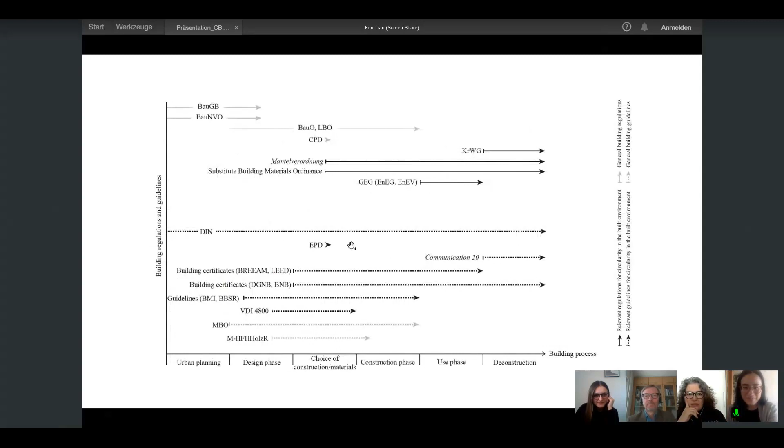Okay, let me try again. Shouldn't be that hard normally. I had some trouble when I tried to do this. Yeah, me too. So, is it still black? No, you can see it. Fine, it's fine. And you can also see the next page? Very small fonts. All right. Good, then let's see how I'm getting out of here again. All right.

Anybody else wants to try? Janika? I can try it. How do we pronounce your name? Janika? Janika, so it's fine. I don't know if it's shared now. But I think if you click on the arrow at the top of the screen, you can just remove the small slides and just have the big one. Oh, like this? It's the same. It's quite small, you know. Yeah.

I did it via the content library because they said you need to upload it there, but maybe that's... Yes, I did the same just in case, but it's really small to read. If you want to share your screen, you can actually do it by clicking the small screen with the arrow at your left-hand side in the black column. Okay, yeah, then I need to open it on my laptop first. Yeah. I can try now. We have tried before, but while Janika opens, I can try mine. Is that okay? Okay, go ahead.

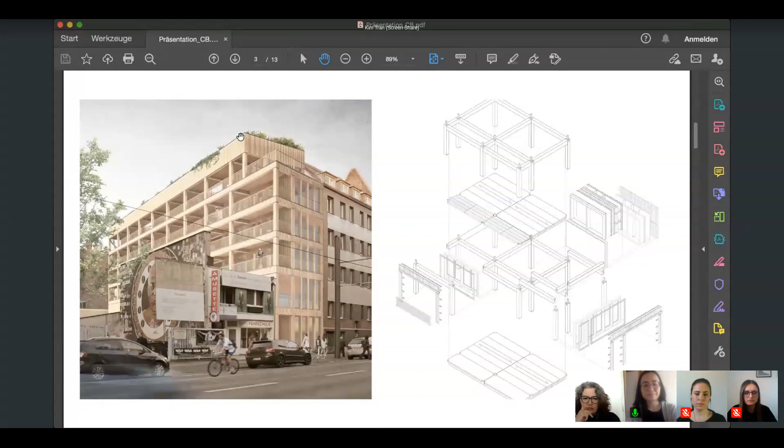And these are then based on the non-obligatory MBO. Apart from this, we have further guidelines and certification systems for sustainable building, which most of all are not legally binding though. So based on this MBO and therefore also the building code of the federal states, the planned buildings are divided into 5 building classes, which are specified by the height and the area of the building. And according to each class, there's a set of requirements for stability and also for fire protection. It's quite easy to remember: the higher the building class, the higher are the requirements as well.

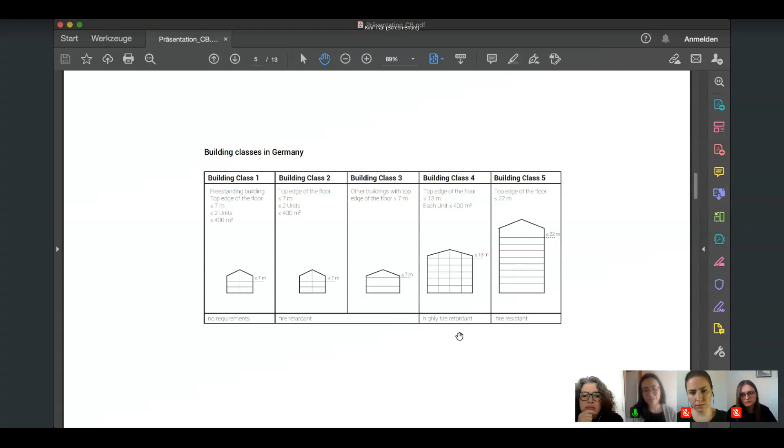So if you look back to our case study, the following occurs. We have a height of 17 meters, so that the building falls into the highest building class, which is building class 5. The requirements for fire protection from class 5 on prescribe non-combustible insulating materials with a melting point of more than 1,000 degrees. So in this case, if we would like to consider cellulose fiber as an insulation material, it will fall out of this range, even though it could meet fire protections even better in some cases. And also mineral insulating materials have a much lower potential in circular economy.

And according to these guidelines, it is also not permitted to have visible timber components, and load-bearing components must also be cladded with a fire-resistant material. The cladding of timber is called encapsulation, and it is supposed to ensure a higher fire resistance which is comparable to mineral materials.

And as you can see in these pictures here, the design proposal that we made does not really fit into these requirements. However, in these cases in Germany, it is possible to hand in special permissions also based on discussions with the firefighters, because after all, in general, you have to consider, even if wood is a combustible material itself, it always needs to be considered within the whole building component and the structure in order to draw conclusions on the fire resistance. And also using sprinklers would help, but actually they're not very well used in Germany.

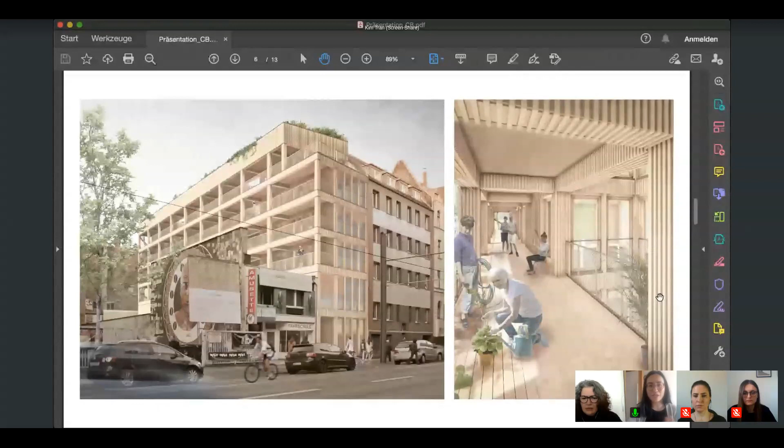So far, multi-story timber buildings up to building class 4, so with a height of no more than 13 meters, are possible in Germany. In building class 5, however, it has been difficult to carry them out without any special permission. So yeah, that's a bit sad because there are already proven international examples that prove that it's feasible.

If we go over to the topic of building with recycled materials, we must consider the German waste and construction law. Here we have the Waste Management Act, which is based on the EU waste framework as a binding federal law. However, it does not set any requirements for the quality or quantity of waste, nor does it set any specifications for the manufacturing of new constructions regarding their recyclability.

Further regulations in Germany, just like with timber construction, lie in the responsibility of the federal states. Here we have other laws that, for example, require waste to be kept separately, but here we also have exceptions which are possible when things are just not economically feasible or technically possible.

Since 2006, the federal government has been trying to implement the Mantelverordnung, a national framework for groundwater, for building material substitution, for landfill and soil protection, in order to uniformly regulate and tighten the recycling of building materials as well as the use of mineral materials. But just like other attempts, such as Communication 20, these regulations and guidelines are orientated towards civil engineering and not specifically toward building construction.

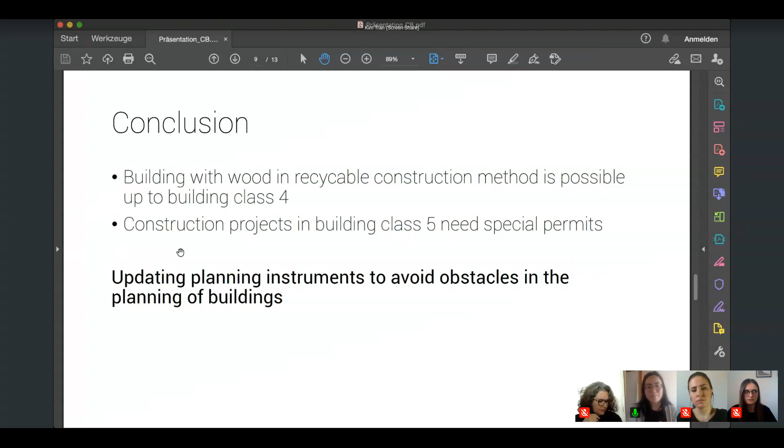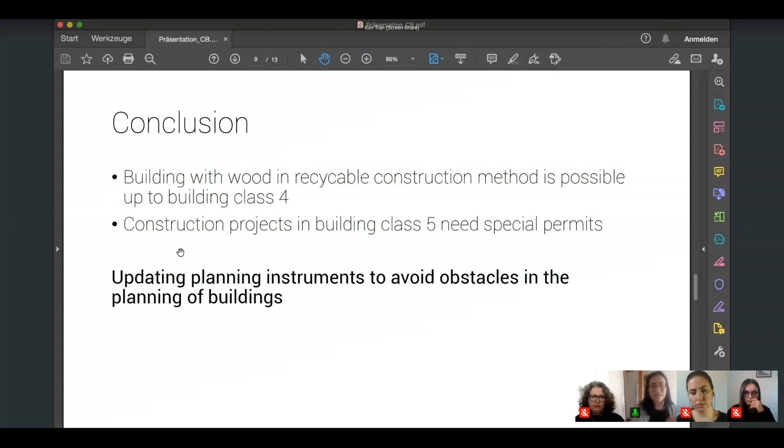So I would say, yes, we urgently need an update in the planning instruments so that ecological buildings do not require special permits anymore. We need an adjustment of the actual building codes, making it easier, for example, to build multi-story timber buildings in building class 5, in order to serve the demand for affordable housing in urban areas while meeting planetary boundaries.

Also, reusing materials so far has been difficult to carry out in Germany because you always need these individual case approvals. It is important to lower legislative and administrative obstacles. There should be a relaxation of standards, an acceleration and standardization in test procedures, as well as more information on used products and end-of-life scenarios. All in all, we need to somehow lower or make the guidelines more flexible in order to not cause too much planning effort. And that's it so far.

Thanks. Thank you very much, Kim. Right on time. Right on time.

I think if anyone in the audience has a burning question, we could take one or so. And it seems that Ronald is definitely having problems accessing the conference website and the room. So if there are questions from the audience, there's time to try to answer one of them.

Otherwise, in the meantime, I would say your presentation made me feel relieved, because if I think of the situation in Brazil, I always thought Germany would be a holy grail to pursue. So it's kind of relieving to hear that's not the way we imagine from far away. Oh really? I'd be interested to know why.

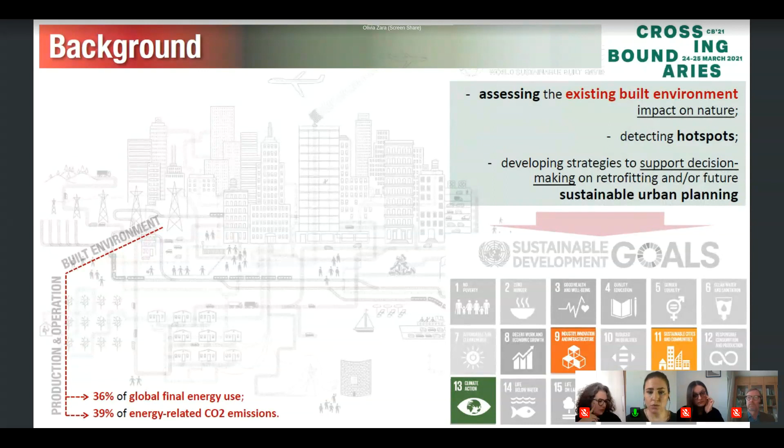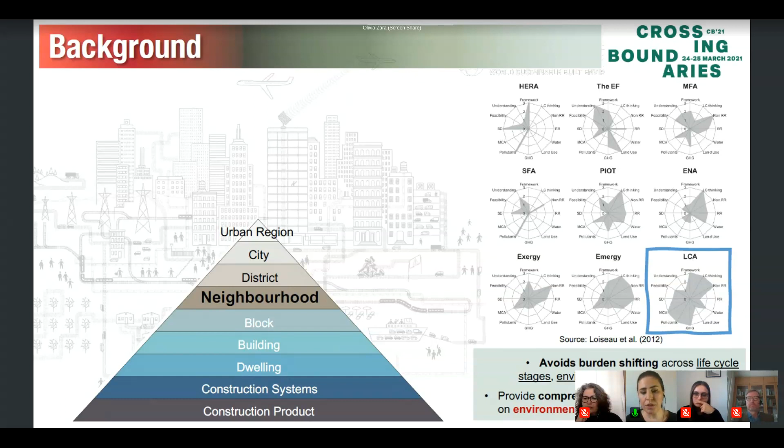However, cities are complex, long-lasting systems, and when attempting to handle urban intricacies, a complexity compromise is to subdivide the urban area into smaller cells, such as neighborhoods. From a variety of existing methods for environmental assessment of urban areas, life cycle assessment stands out due to its ability to avoid burden shifting across life cycle stages, environmental impacts, and territories, and its ability to provide urban decision makers with comprehensible information on environmental sustainability.

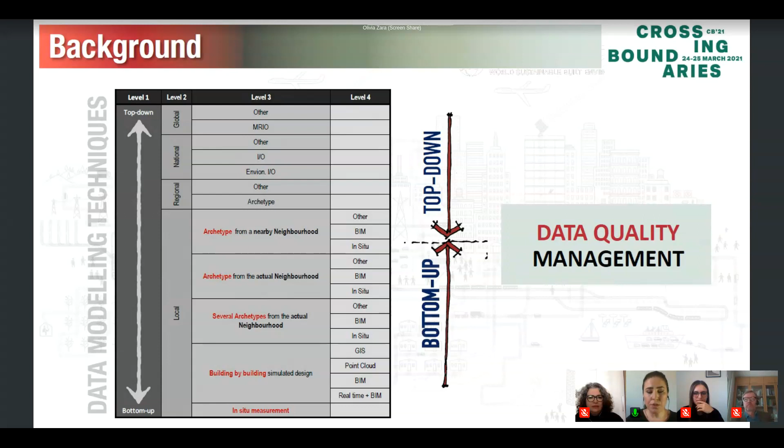Nevertheless, due to its comprehensiveness, detailed scope, and multi-criteria assessment potential, life cycle assessment is a data-intensive approach, and at the neighborhood scale, data challenges are even more intensified. Moreover, as the reliability of life cycle assessment outcomes depends on the quality of the original background data, data quality management should be an integrated part of the process. Thus, finding balance between required and feasible information collection, and determining the best way to handle data quality and uncertainty, should be a priority when pursuing reliable results.

Therefore, this study explored how data collection and modeling methods influence the data requirement modeling quality balance in neighborhood life cycle assessment. It explored top-down and bottom-up approaches to generate information input for life cycle assessment at the neighborhood scale, aiming to identify strategies to improve modeling while balancing data collection needs. This represents the first of a three-phase research project aimed at developing a methodological framework for life cycle assessment at the neighborhood scale. Two life cycle assessments were performed in a single urban block of the University of Campinas campus, containing 15 buildings and surrounding infrastructure, using top-down and bottom-up data aggregation approaches.

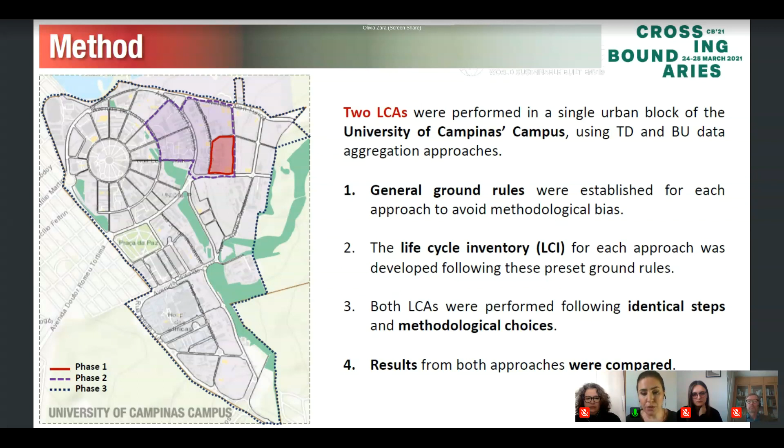The method followed four main steps. First, general ground rules were established for each approach to avoid methodological bias. Second, the life cycle inventory for each approach was developed following these preset ground rules. Third, both life cycle assessments were performed following identical steps and methodological choices. And finally, results from both approaches were compared.

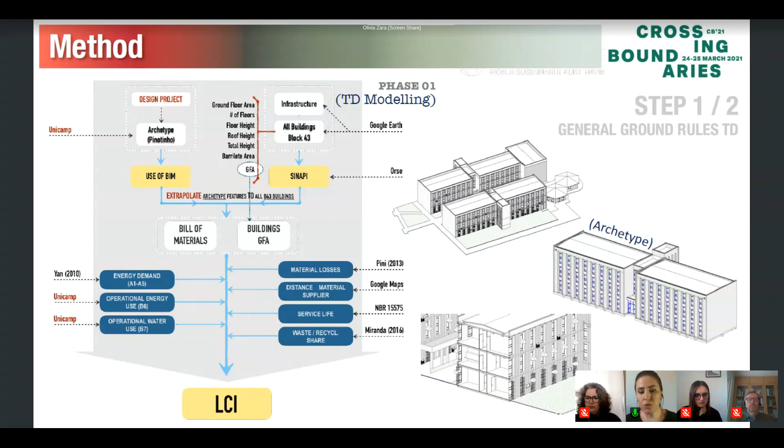As a general ground rule for the top-down approach, mainly national, regional, and local data based on one specific archetype that best represented all of the campus's buildings could be used. This archetype was modeled using a BIM tool, and its features were then extrapolated to all of the buildings in the studied urban block.

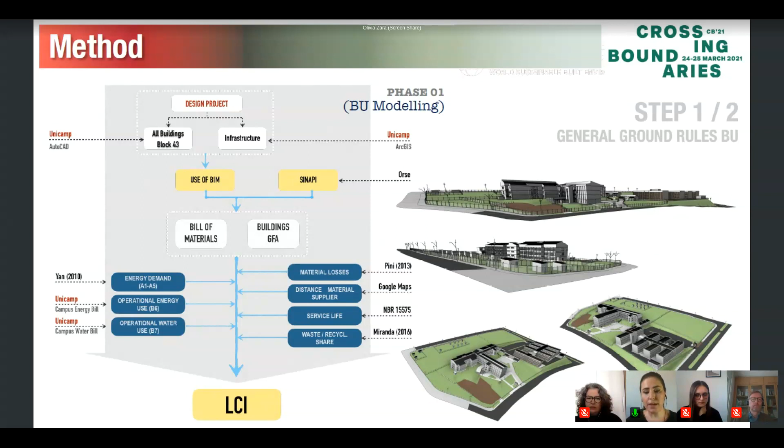For the bottom-up approach, on the other hand, we got the design documentation of each of the 15 buildings and surrounding environment and modeled it using a BIM tool. Then we were able to automatically extract a more detailed bill of materials and gross floor area, enabling a more refined and realistic life cycle inventory analysis.

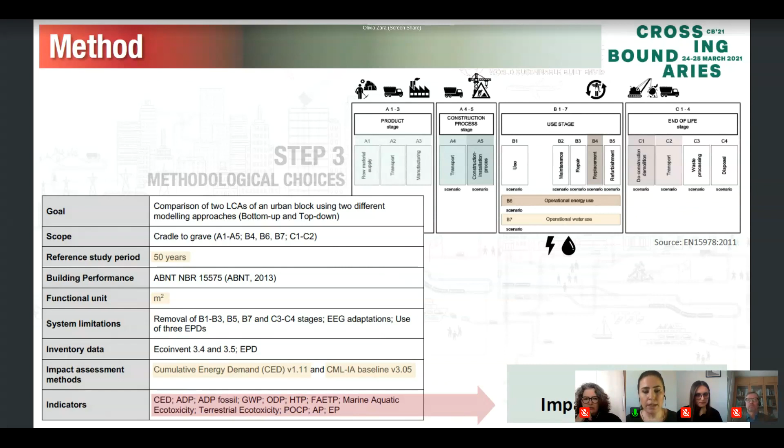Both life cycle assessments were performed following identical steps in terms of system boundary and methodological choices. A 50-year reference study period was used. The functional unit considered was square meter. The impact assessment methods were cumulative energy demand and CML baseline, and 13 impact categories were considered.

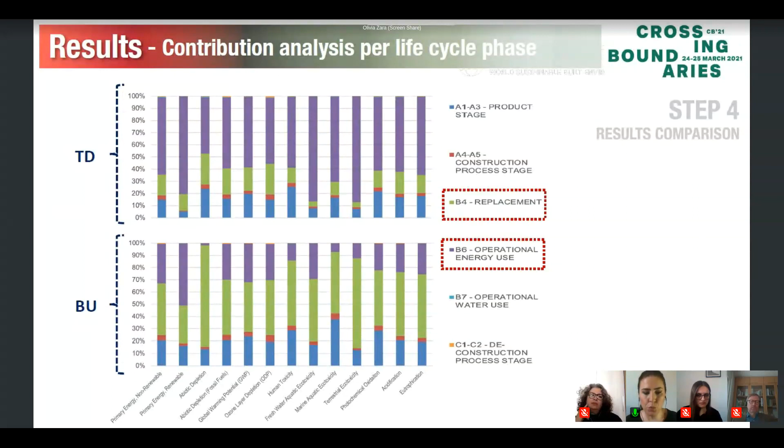In terms of results, we were able to identify significant contribution discrepancies between both approaches. For example, when comparing the contribution per life cycle phase, we can see that the replacement stage is considerably underestimated in the top-down approach, which is dominated by the operational energy contribution. This can also be seen when comparing results of the contribution analysis at building elements level. The top-down approach is still dominated by energy use contribution, while the bottom-up approach highlights the impact of interior partitions and finishing, which should not be neglected, as the impacts are substantial.

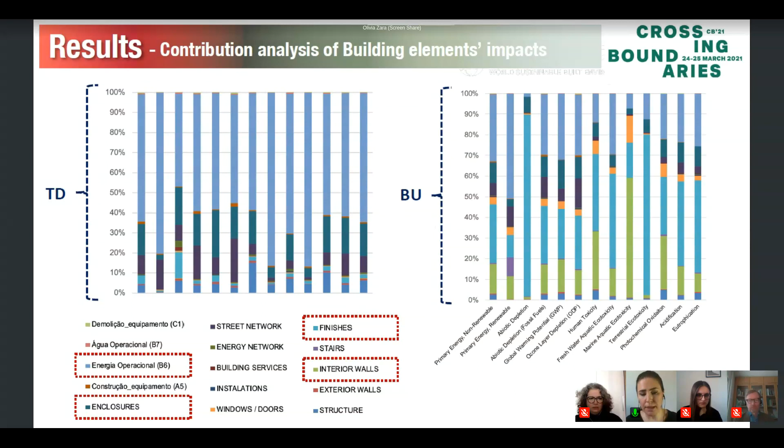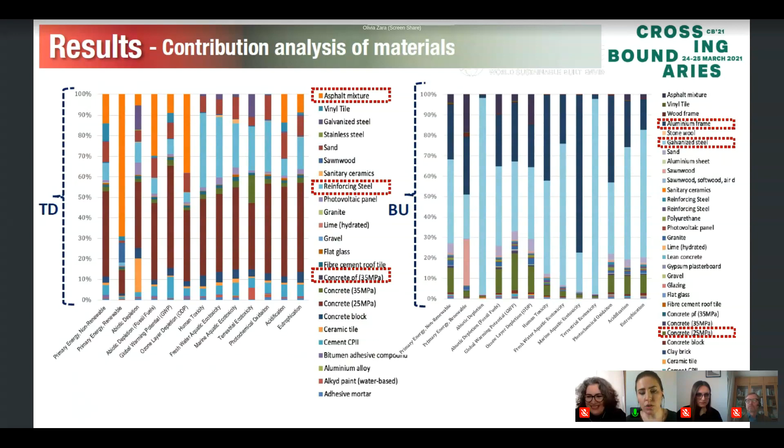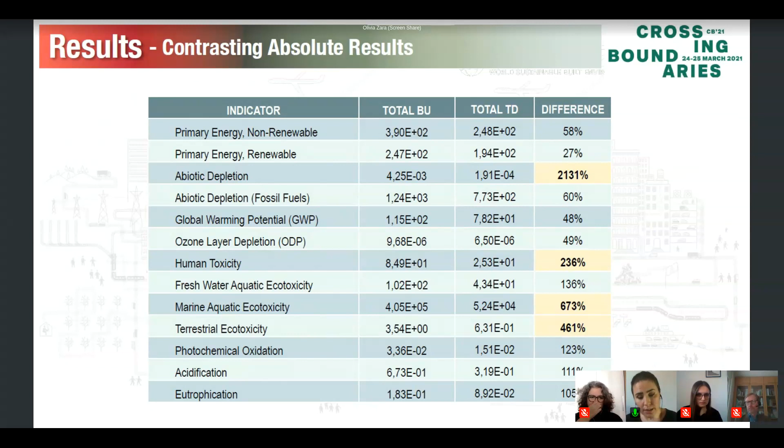In conclusion, the top-down approach underestimated overall impacts. Influence of the interior finish and wall partition is not captured by the top-down approach, but should not be neglected, for the impacts are substantial.

An evolutive hybrid approach will be pursued to gradually improve both background archetypes and foreground bottom-up objects, comprising, among others, a context analysis of the neighborhood, archetype definition complementation, a bottom-up approach lifecycle assessment of these chosen archetypes, establishment of a data quality scale into levels to identify how each data should be handled in terms of uncertainty and sensitivity analysis, and cutoff rules that can limit data requirement and improve modeling.

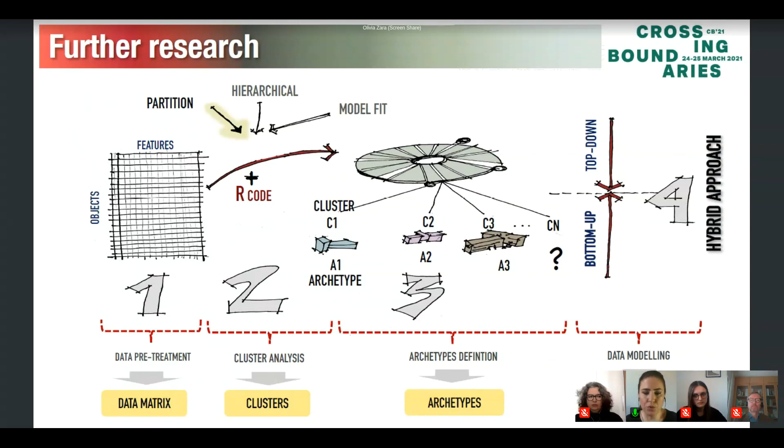Finally, in terms of future research, cluster sampling techniques will also be applied. They were actually already, to derive a minimum range of archetypes to adequately describe the studied area, assisting on a more representative hybrid approach. And this is what Professor Vanessa will be presenting in the next session. Thank you, everybody.

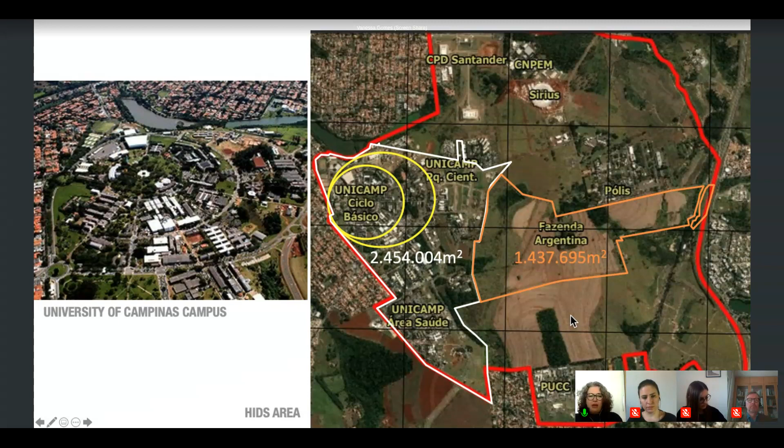What you see in red is the area reserved for the International Hub for Sustainable Development, which encompasses not only the Unicamp area, but also 2 other universities, several research centers, technology companies, and should be developed according to the best practices regarding sustainable urban and building construction. But how do we define the baseline in practice?

It might sound funny for some of you, as several places have developed a set of representative or average buildings, but most, if not many situations, most of them lack basic characterization of the built areas and need a starting point. The procedure used in the first case to define the set of average buildings is not always well detailed in the literature.

Hence, we had a twofold goal: to not only explore different data aggregation techniques, but also to make decision-making very explicit to help others that would follow us.

For those who are not familiar, clustering is actually a pattern recognition technique which divides the entire data set into meaningful groups called clusters, based on the patterns found, so that the data items within each group are similar, but are dissimilar across different groups.

Probably the most well-known and used partition method is k-means, which partitions a set of n points into a k number of clusters, in such a way that the distance between each point and the centroid, that is the average of all points in that cluster, is minimized.

Just to illustrate and make it easier to visualize, we start by assuming a certain number of clusters, and then initialize the cluster centering positioning. Then the R code starts running through the first line of the data table and calculates the distance between the data point and the closest, nearby cluster centers.

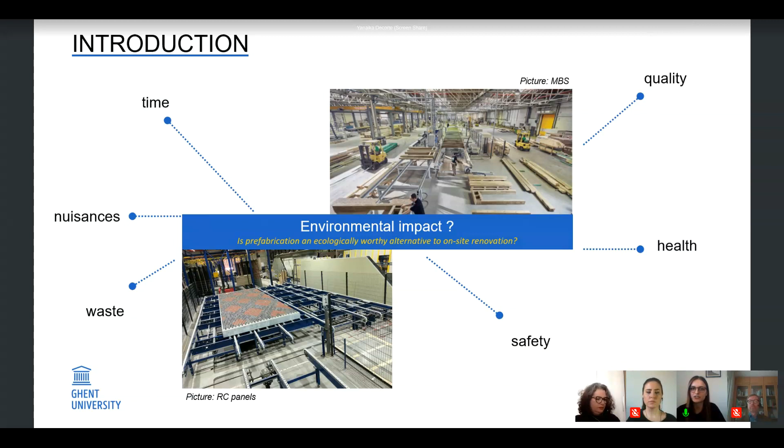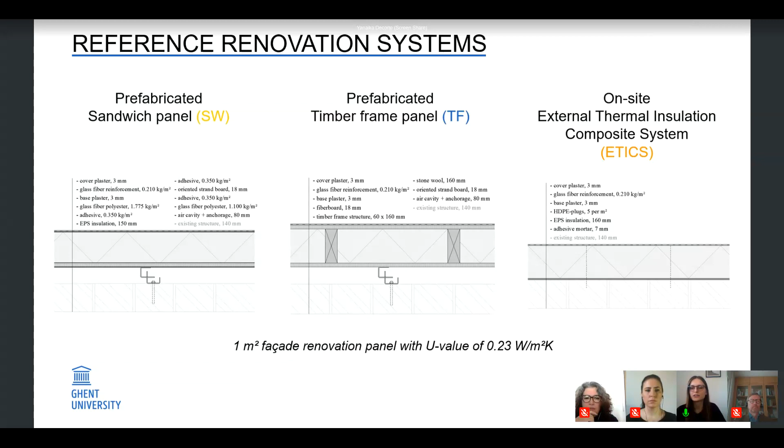To answer this question, we elaborated 3 reference systems: a prefabricated sandwich panel, a timber frame panel, and an on-site ETICS panel. The different constituting materials are displayed on the slide. Only the finishing is assumed to be equal, and the rest of the composition is different. Each system also has an identical functional unit, being 1 square meter facade renovation panel with a U value of 0.23 watt per square meter Kelvin.

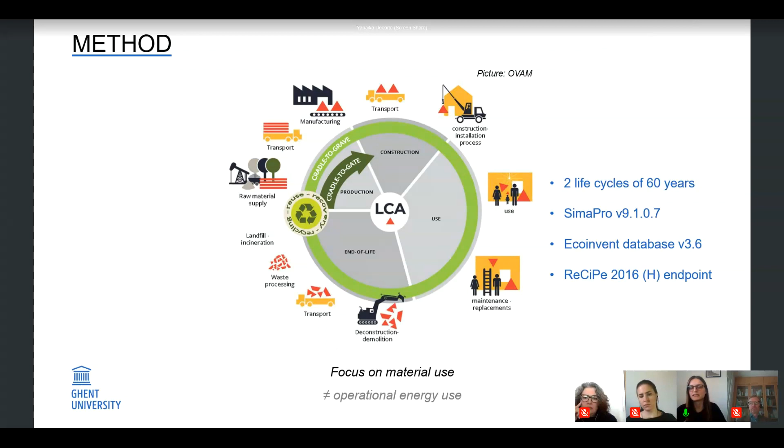To quantify the environmental impact of the reference systems, we have used LCA, or lifecycle assessment. The research concerned a cradle-to-grave approach over 2 life cycles of 60 years, including all material-related stages: the production, construction, replacement, and end-of-life stage. The operational energy use is assumed to be equal, so this is not considered in the study. We used the software SimaPro, and environmental data were obtained from the Swiss EcoInvent database. Furthermore, the ReCiPe endpoint method was applied to translate all inventory data into environmental impacts. The final results were converted into a single score expressed in points.

To indicate the differences between on-site and prefabricated reference systems, each life cycle stage got a separate focus in the paper, but for this presentation, I will first zoom in on the results regarding the production stage. Then I will talk a little bit about the end-of-life scenarios we assumed, and in the end, I will come to the environmental impact over the considered 2 life cycles of 60 years.

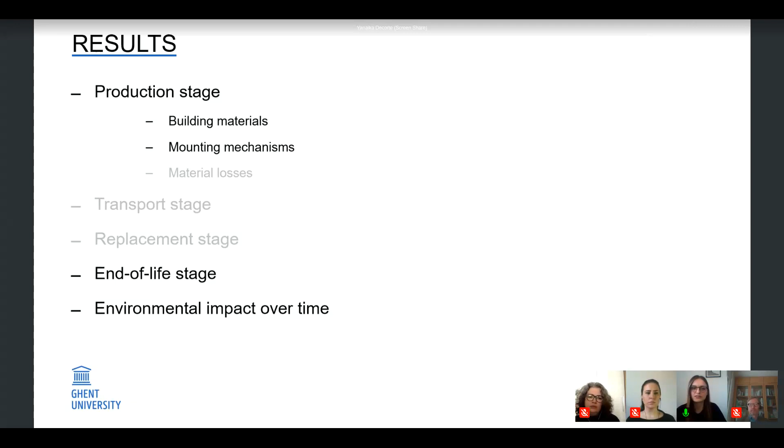The ETICS system is mounted via an adhesive mortar and high-density polyethylene plugs, and a double rail anchorage system in galvanized steel is used for both the prefabricated panels. The impact of the galvanized steel rails is almost 3 times higher than the adhesive mortar used to mount the ETICS system. For this reason, we also investigated 3 alternative mounting mechanisms for the prefabricated systems.

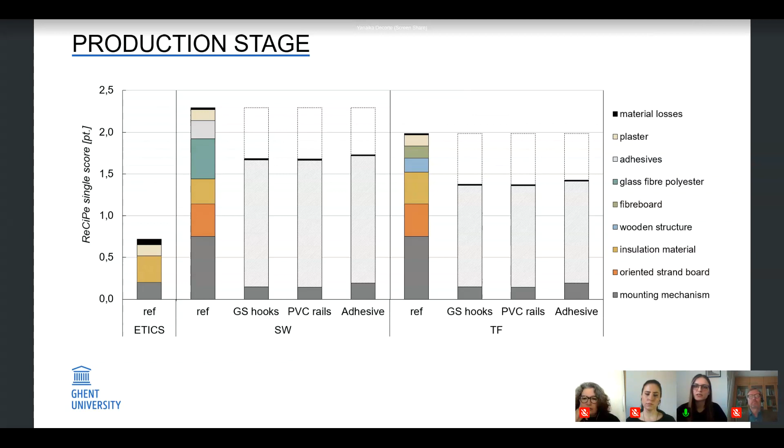From the results, we can see that the alternatives score significantly better than the original mounting mechanism. The highest reduction is noticed from the galvanized steel hooks and also the PVC rails. With these systems, the panels also remain easily demountable, which is a positive aspect in terms of circularity. For the further research, we continued with the steel hooks.

For the end of life stage, we elaborated different scenarios per reference system. It was not the intention to perform a detailed end of life scenario analysis, but to provide some first insight into how to address the benefits of circularity from a practical viewpoint based on a more limited number of scenarios. So we consider landfill, recycling, and reuse.

In case of ETICS, we assumed that the system was fully disposed and sent to landfill, since disassembling the separate materials is rather hard because all layers are glued. This is also the case for the sandwich panel, but there we assumed that the steel hooks could be reused in the second life cycle.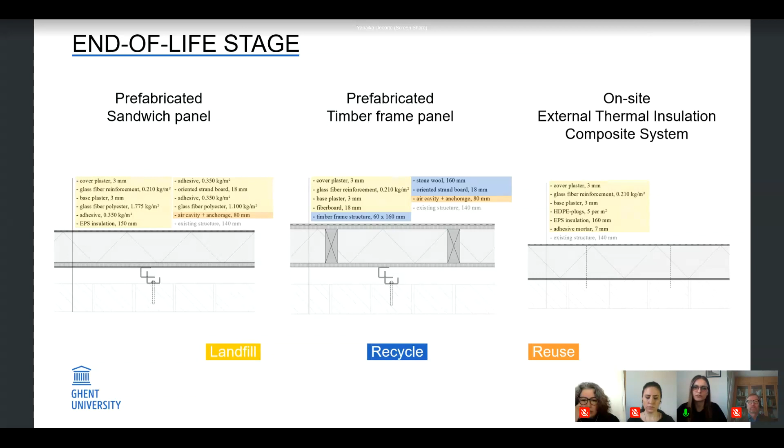In case of the timber frame panel, only the plaster layer and the fiberboard will be sent to landfill, and all other building materials are assumed to be high quality recycled because of the dry connections. The steel hooks are again considered to be reused in case of the timber frame panel.